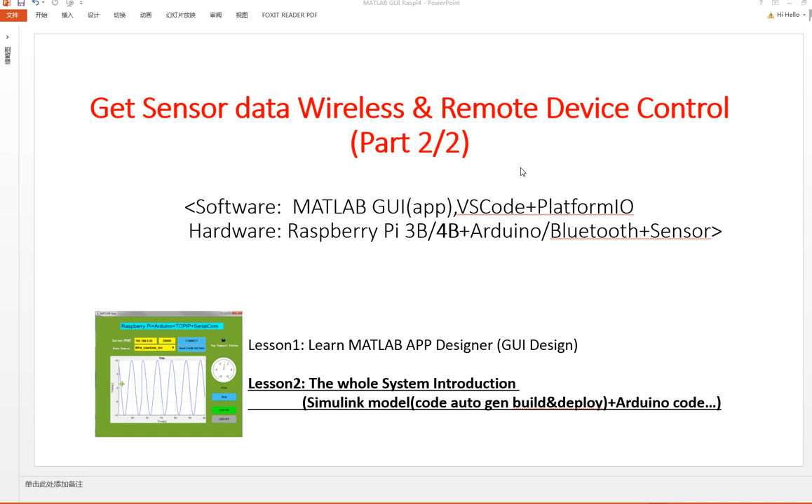Okay, let's continue to introduce the subject about get sensor data, wireless and remote device control, part 2. Before we start today's lesson, let's briefly introduce the system framework.

The GUI is developed by MATLAB App Designer. You can use it to send commands and show the received data. The sensor is connected to Arduino, and Arduino gets the data and sends it to Raspberry Pi by Bluetooth module. Raspberry Pi receives the data and transfers it to PC by Wi-Fi. This is the whole system framework.

Let's see the real thing. Okay, I have run the GUI. This is the GUI, and this is...

This is the system construction. This part is the Arduino, and I directly connected the sensor and Bluetooth module on the Arduino Uno board, and the battery is also directly connected on the board. Yeah, this is the whole system.

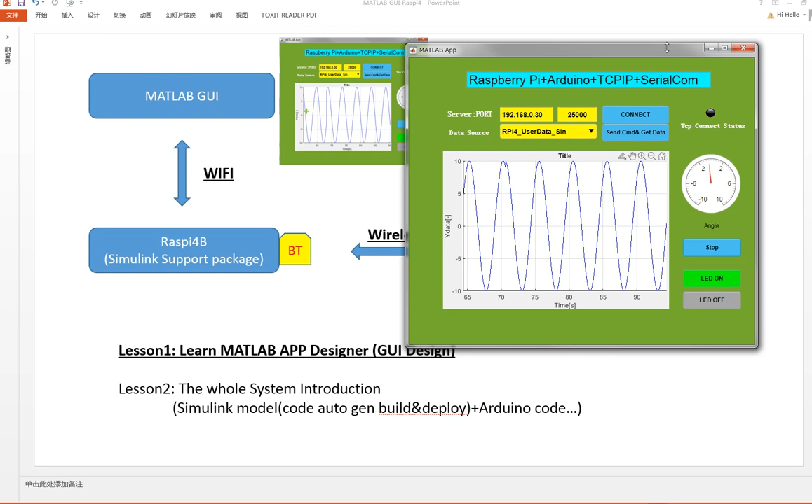Today I will introduce lesson 2. Let's first stop this data and stop the connections. Okay, stopped it.

In my previous video, I introduced the App Designer tool to design your GUI, and I introduced the code of the GUI.

In this lesson, I will introduce the Raspberry Pi and the Arduino, the code you run on the two boards.

Okay, first let's introduce the Raspberry Pi. I developed Simulink models, both of them, and I directly code, build, deploy, and run them on the Raspberry Pi.

Let's first introduce this module. Now the TCP/IP connection is in this subsystem. You can click it and see the contents. Wait a moment, slowly...

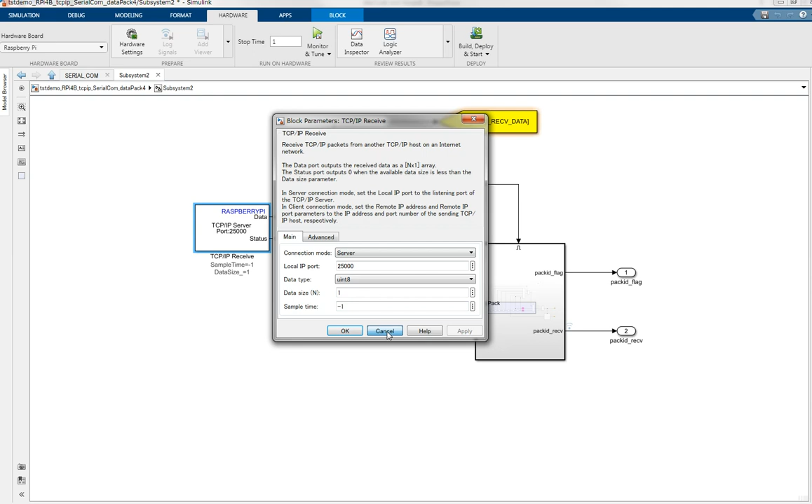When the status equals 1, it shows that the received data is successful. I use it, otherwise I will use the previous data.

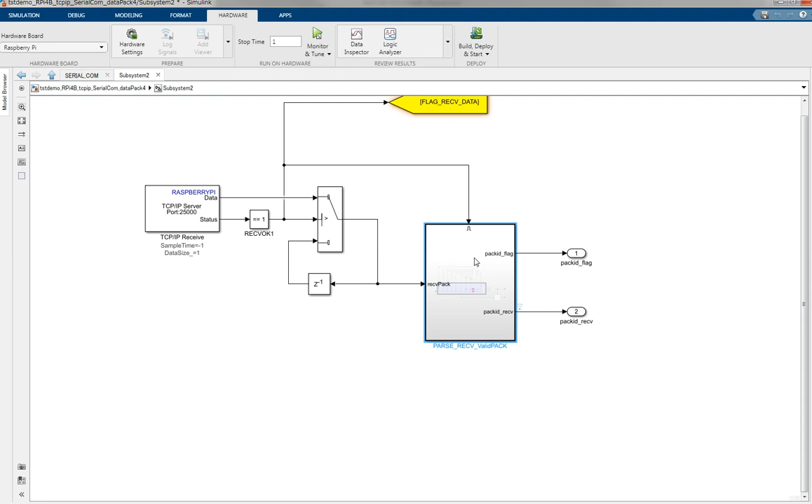When the received data is enabled, it will use the received data, and I will pass over the data.

As I said, for data transmission I use a package format: first the package header, header1 'S', header2 'L', then the package ID, then the data (1, 2, 3, 4), and the last part is the footer. The footer is created using bitwise XOR of the header and data. This is the package format I used to transfer the data.

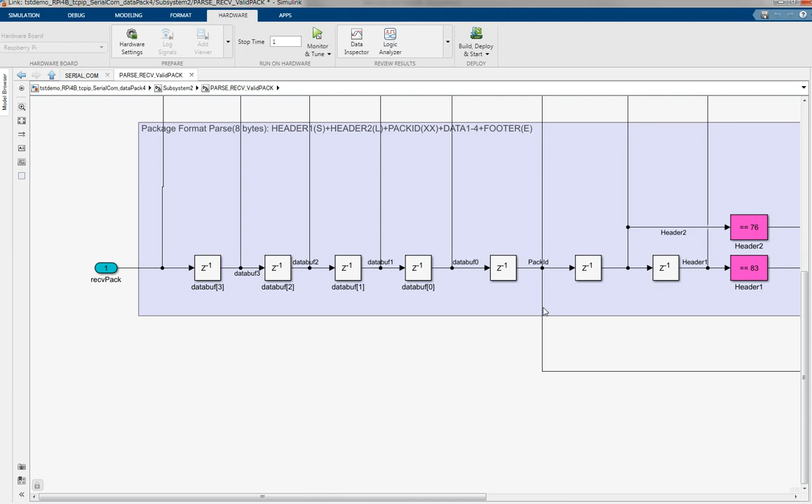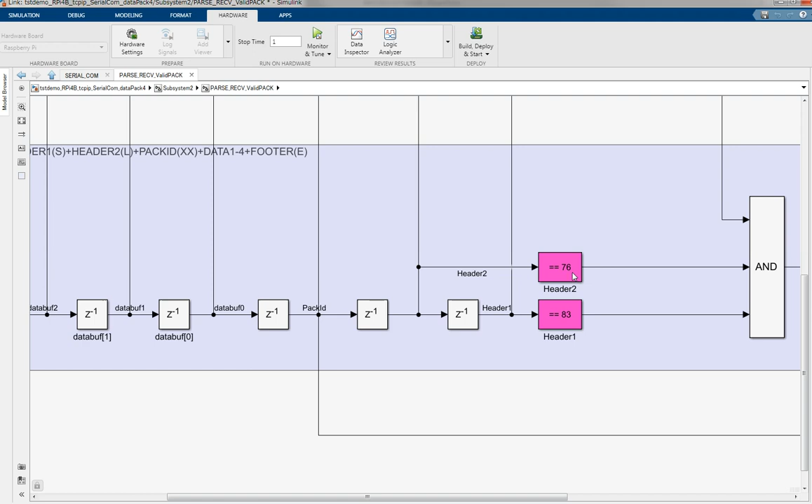In the code, I first judge the footer and the header. Header1 is 'S' (ASCII code 83), header2 is 'L' (ASCII code 76). If these check out and equal 1, it says the received packet is valid.

I use it and read the packet ID. I read the received packet ID and compare it, like here.

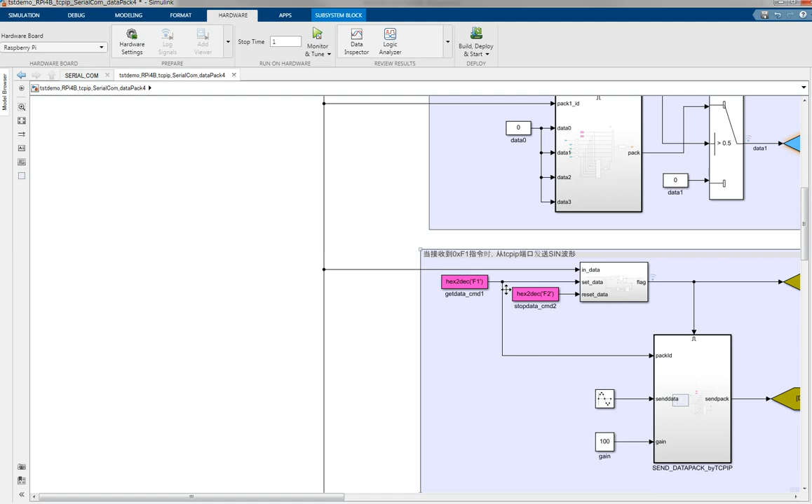When it equals the command ID F1, it will trigger the subsystem. The subsystem is here, you can see it.

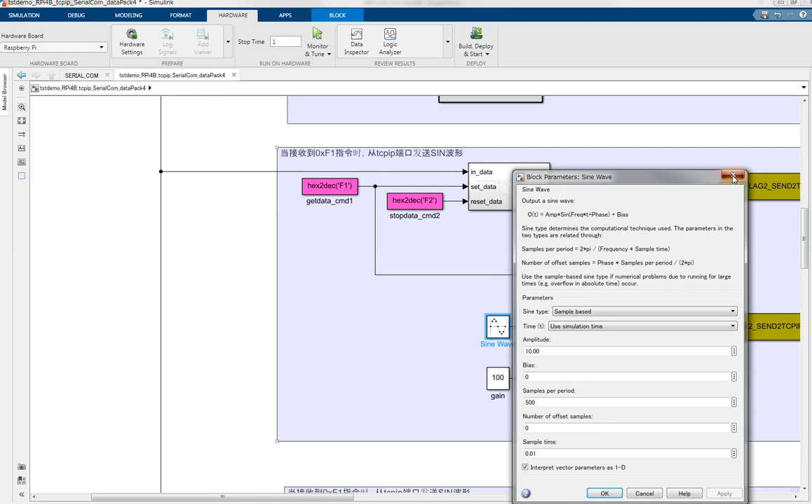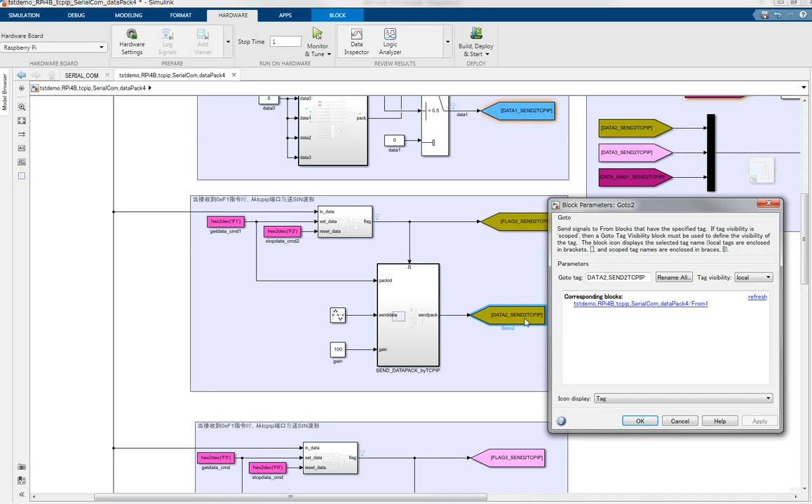You can see the sine curve. It will create the sine data and send it from here to PC. You can double click it and click it, it will change here.

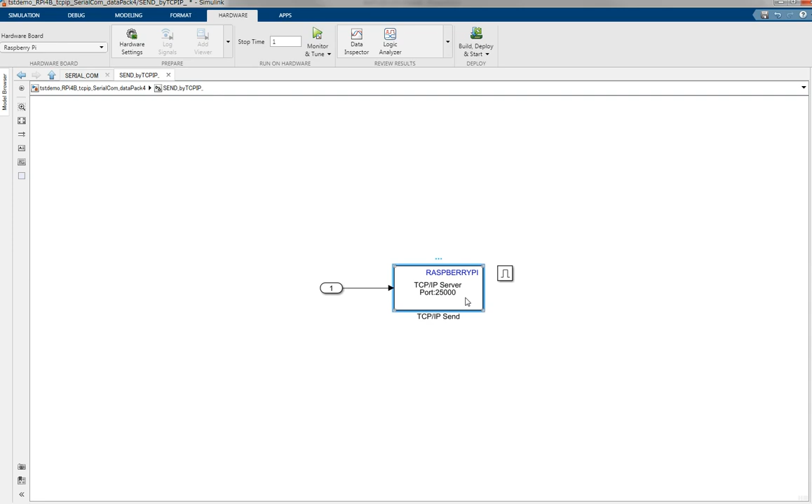Here it will send the data to the TCP/IP send block. It will send the data from the server's local port.

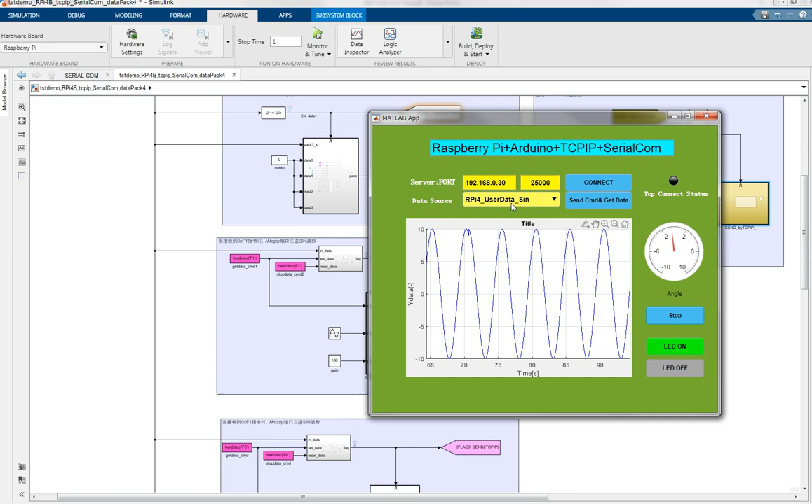Okay, this is one where I click the button and select the item. It will send the command F1. Packet ID is F1, and it will retrieve the feedback, the send data to the PC.

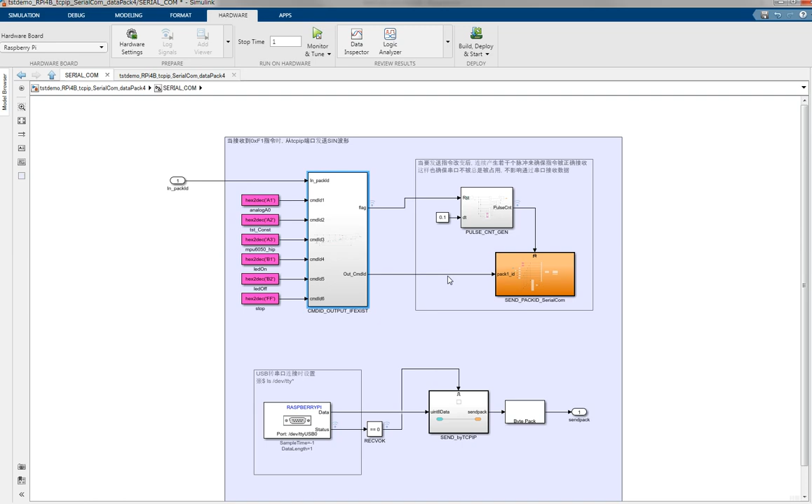Now I will introduce the part where the packet ID equals A1, A2, A3. This packet ID is used by the Arduino board C code. I have predefined one equal this one. Any command ID will trigger the block. The block's function is to send the packet.

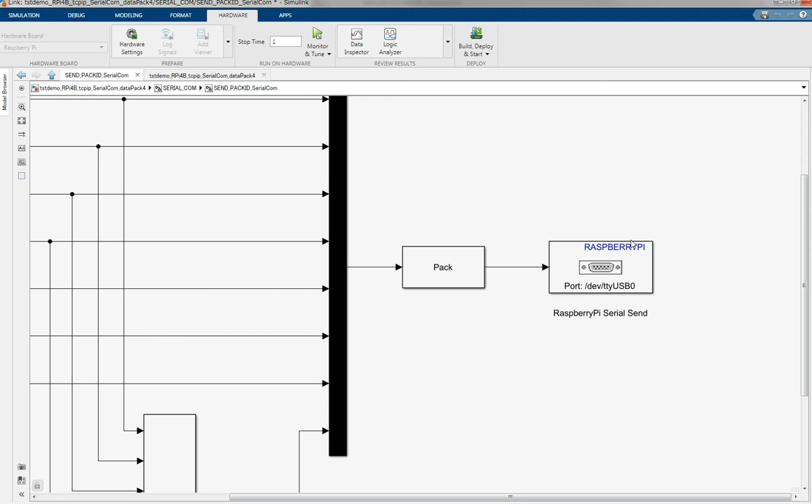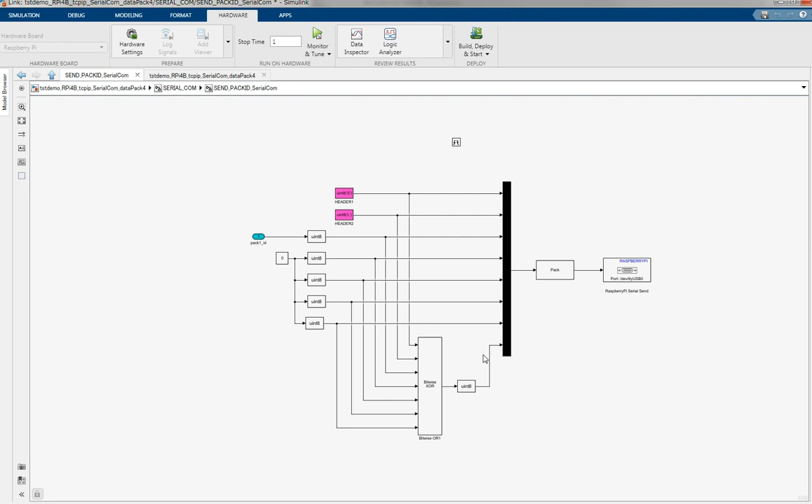to Bluetooth. Here Bluetooth is serial communication. So its meaning is the package is also the same package: star, head 1, head 2, and packet ID, and data 1 2 3 4, and footer. The package is used to send to Arduino. Okay, later I will show you the Arduino code.

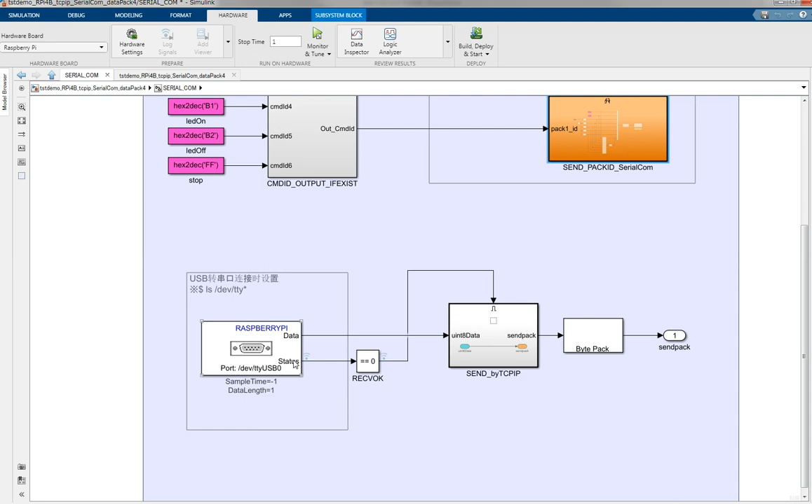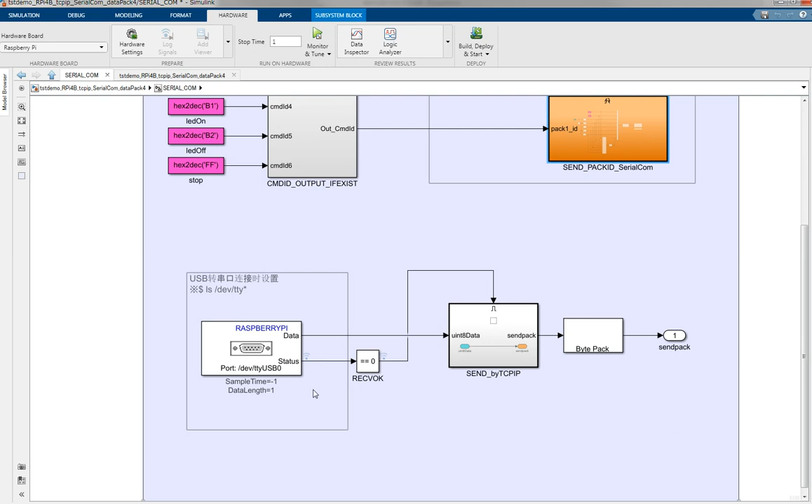When the Arduino code receives the code, it will execute, perform the target. That's the code. This code is retrieved from Arduino code from a Bluetooth module. It receives the data, and I will transfer it

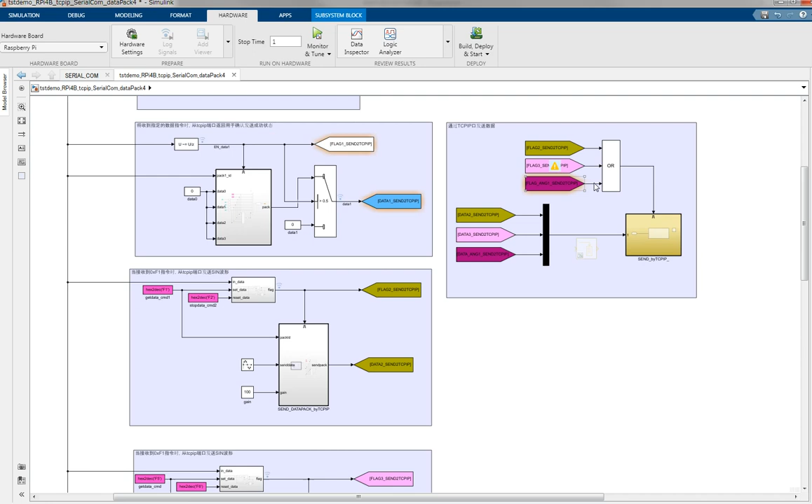to TCP/IP, this part. I will transfer it to TCP/IP to PC, because the connection is created between PC and Raspberry Pi. Okay, this is mainly the idea and the module I have created.

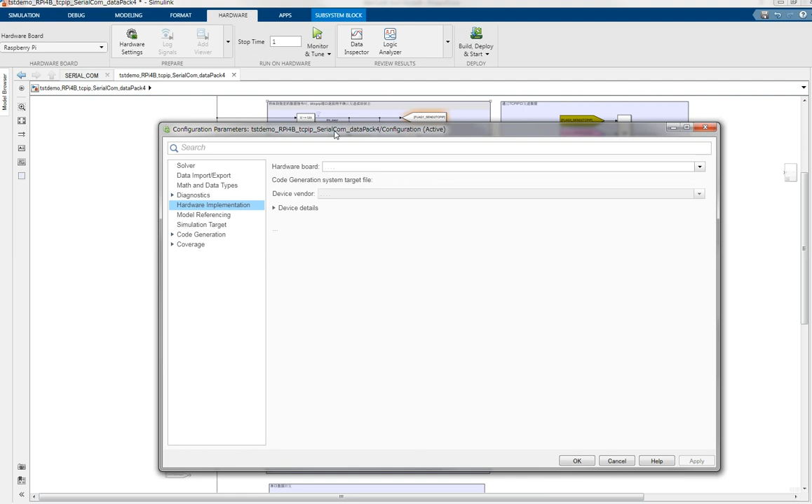When you want to build and deploy the module to Raspberry Pi, first maybe you should do the hardware setup settings. You should set the IP address and password you have used. Then you can here, okay, please wait a moment.

Okay, after the settings, I will click the buttons. It will automatically deploy and start on the Raspberry Pi.

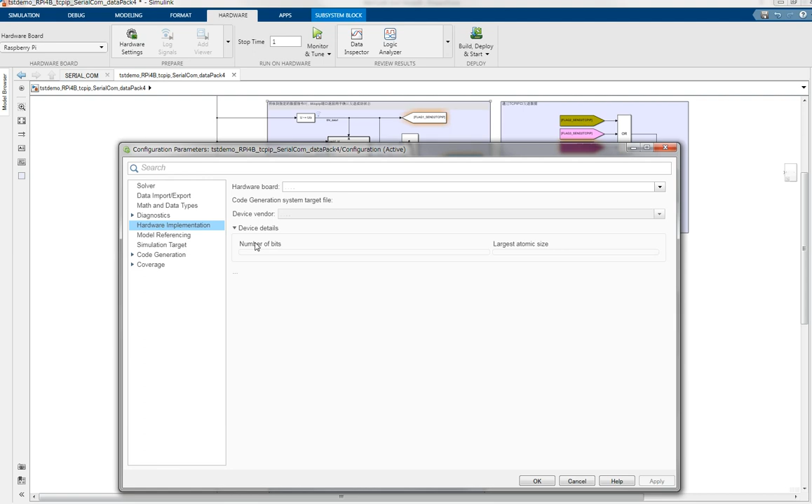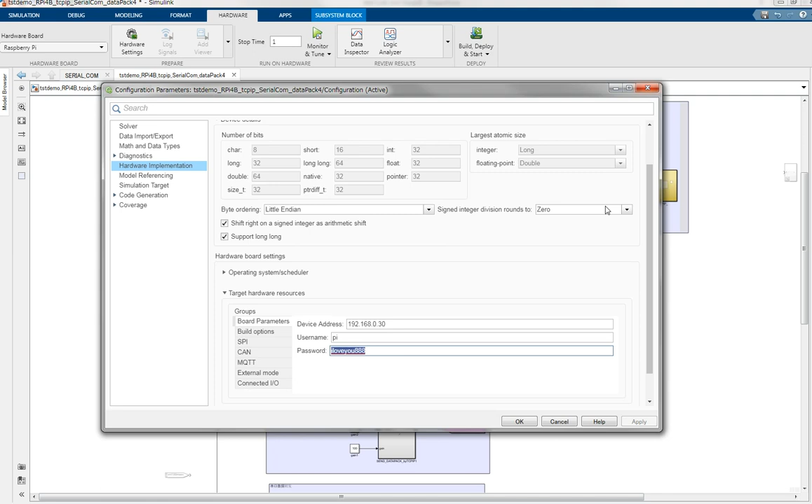Okay, this is the settings on my system. This is the IP, username, and my address, my password I used. After the settings, I will click it. Maybe okay, now I click it.

After you click it, you can change it to the command window. You can see the changes, the message output. After you get the report, it shows that you have successfully completed code generation. Now I change it to deploy. It's okay.

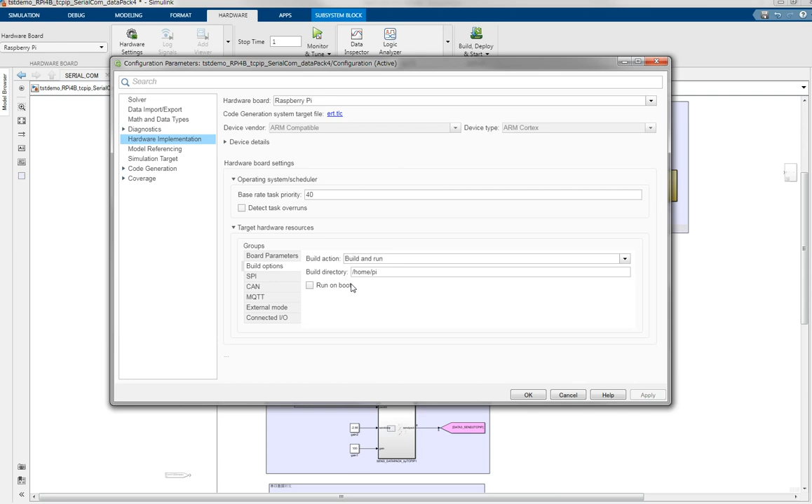Okay, let's briefly describe the settings. Here are the build options, build and run. On this selection, if you select it, it will run on boot. The Simulink module you have deployed will run.

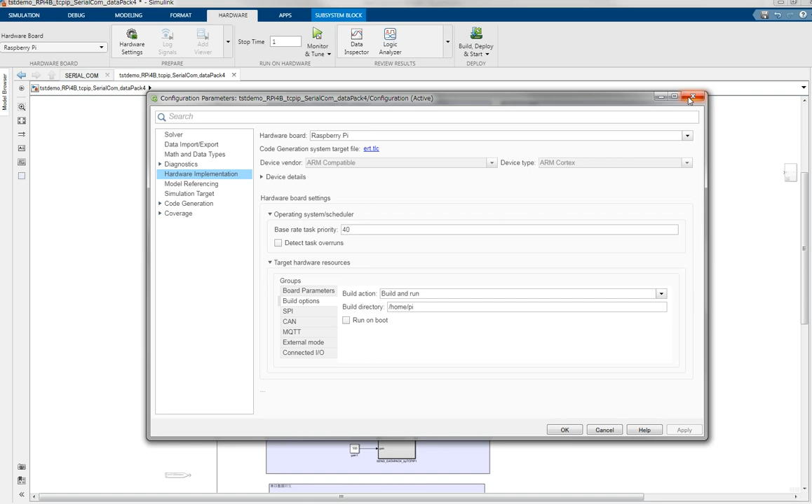If you check it, it will run when your Raspberry Pi powers on. If you uncheck it, it will not automatically auto run. So now I don't check it. Later I will show you how to run the Simulink modules from the GUI.

Okay, this is the Simulink modules. Next, I will show you the Arduino board, the code used in the Arduino board.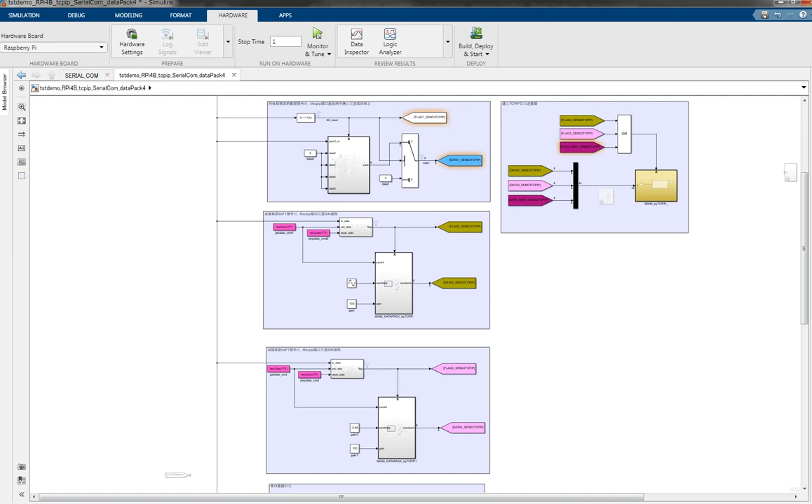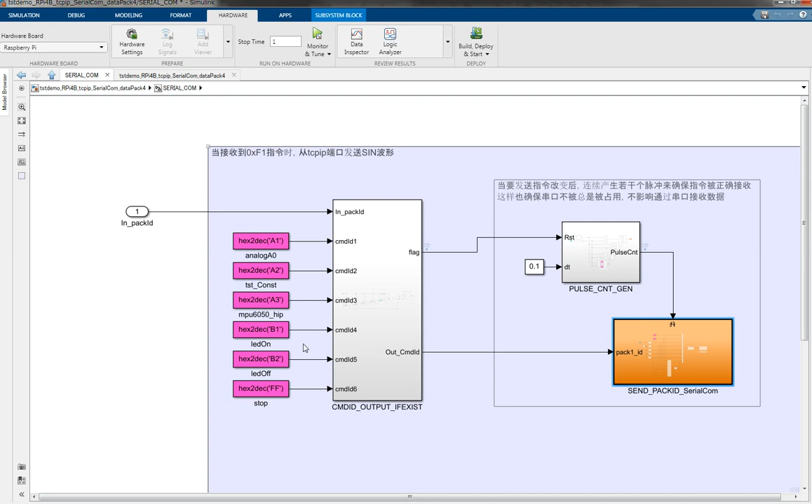It's the same as I have defined here. This is the code, the command ID defined in Visual Studio Code, which I have here. I use FF as the stop command.

Next, this part is used for the MPU 6050, and uses the various I2C settings to configure it. This is the function defined in this code.

Our setup is the first part that runs one time, and the loop here is the core, I think.

Okay, this part is a Bluetooth module used as here. This function is used to pass through the packet data and get the packet ID and package the data from the received packet. Okay, this part I can go to definition.